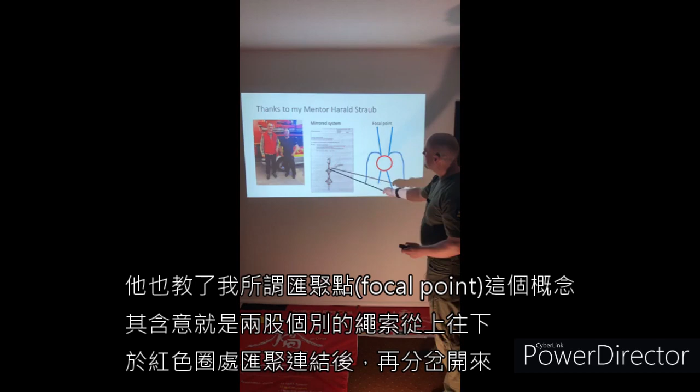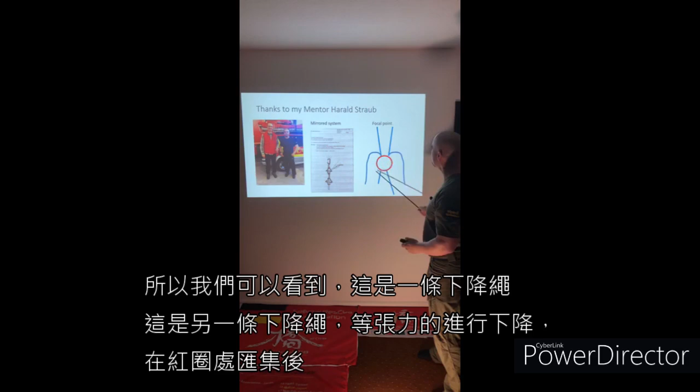And he taught me about a focal point. A focal point means that all the ropes from a lowering system come together at a focal point and are divided again. So this is one lowering rope, the second lowering rope. They are equally loaded. They come together at a focal point and share the load again, maybe to a casualty and to a rescuer. And I added bypasses to get a little bit more redundancy in the system.

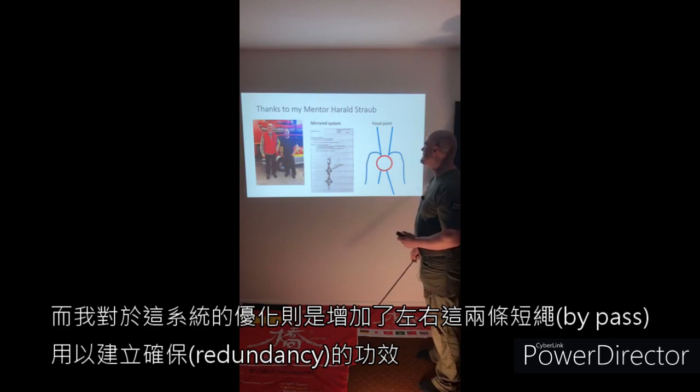So that you can imagine that better, I made this drawing for you. Both ropes come together at a rigging plate, the forces are divided again, and we have these bypasses. He taught me as well that a master's aim is to build compact systems, because if you have that, it's way less exhausting to get a stretcher over an edge without an artificial high directional. So if you want to train in a robust manner, you should search for compact systems.

On my approach to the system, I read many books, and one of those books is High Angle Rescue Techniques by Tom Vines and Steve Hudson. In that book, I found this drawing of the interlocking long-tail bowline as a focal point. I really liked this idea because it brings both ropes together and shares the force again.

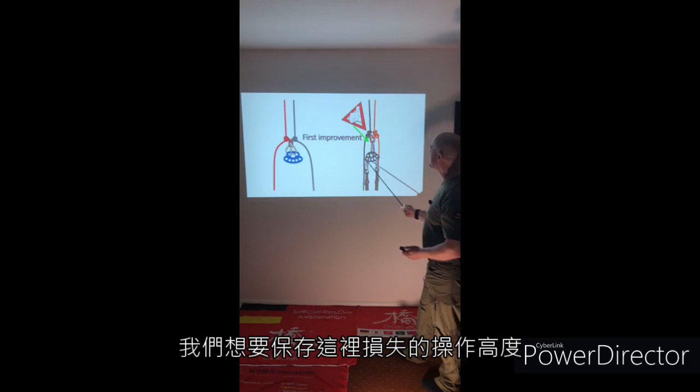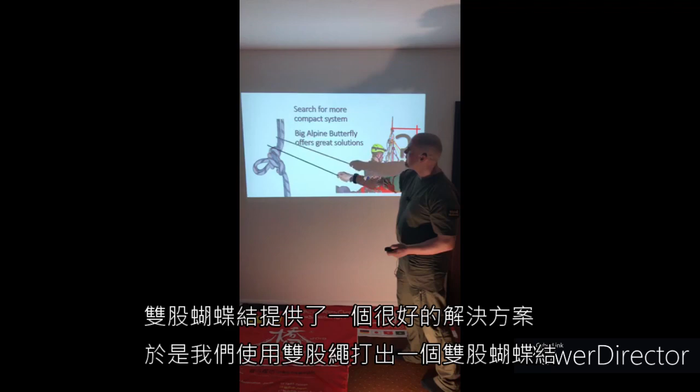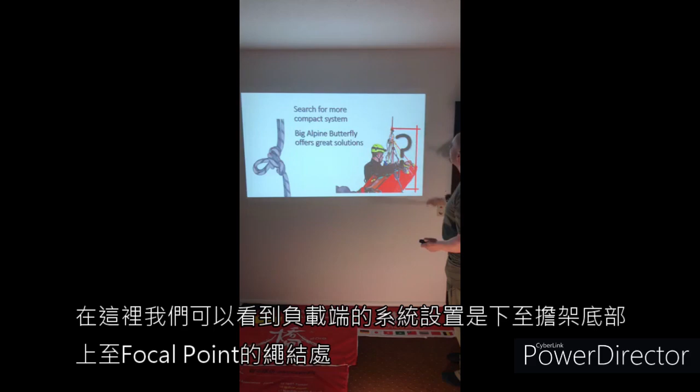And the big Alpine Butterfly offers a great solution for us. So we just take two ropes and make the butterfly knot with two ropes, so we're getting the big Alpine Butterfly. And here you see the system headspace is from the floor of the stretcher to the upper side of a knot. And the question is, how long is that?

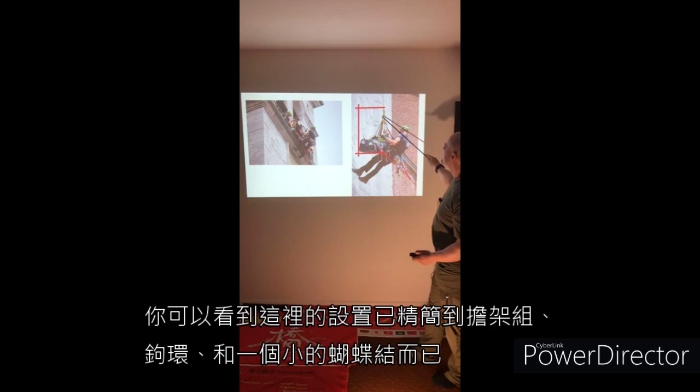I like flexible connections to the casualty because if you get lowered, you can adjust yourself and you can adjust the length. It's way easier to communicate with your lowering team. And especially if you have suicidal persons, you can lower suicidal persons below your feet, so they can't reach you, because they are in big stress and you don't know how they react. So I like to lower suicidal persons below my feet.

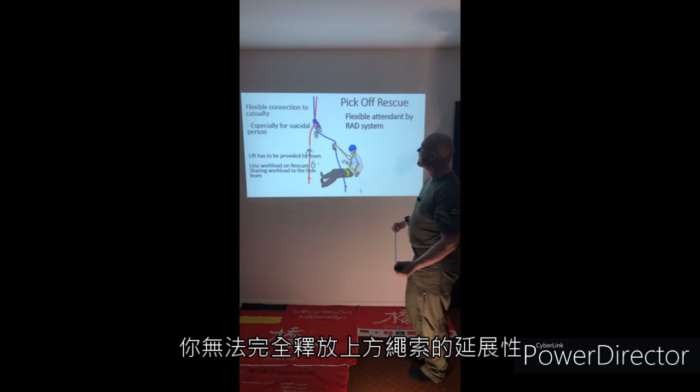I made a pick-off rescue on a wind turbine when 70 meters of rope were above us, and if you think you can make this with a short 4-to-1, I can tell you, you won't get out the stretch of the system. In that case, I just clip him. The rescuer has just the workload of clipping the rescue triangle and the redundancy, and the lift will be provided by the team. So we should have less workload on the rescuer. We should share the workload with the whole team.

From pick-off rescue to a stretcher rescue, we just have to change the grillon. We bring a stretcher in and take the grillon out. The biners from the big Alpine Butterfly to the stretcher are doubled and opposed, as they are highly exposed to edge and surface contact during edge transfer. So here on that point between our big Alpine Butterfly and the stretcher, we use 2 biners doubled and opposed.

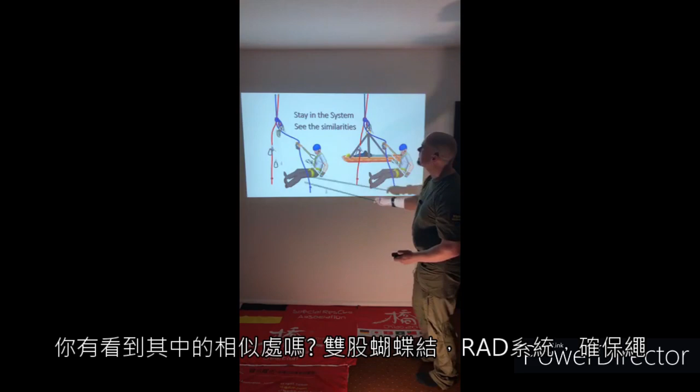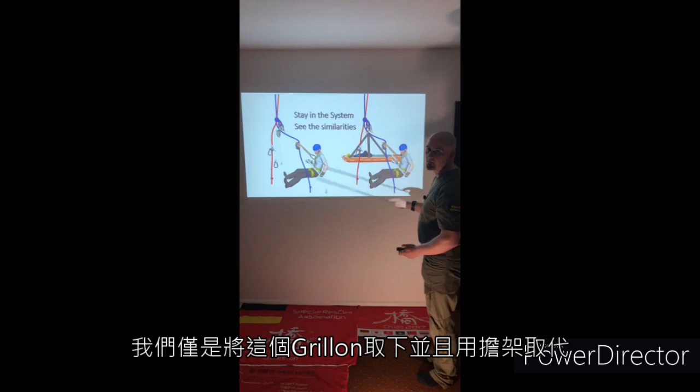So the big part stays in the system. Do you see the similarities? Big Alpine Butterfly, RAD system, backup, a short connection to casualty, and a bypass. And we just take this grillon out and take a stretcher in. So this is the way from pick-off rescue to stretcher rescue.

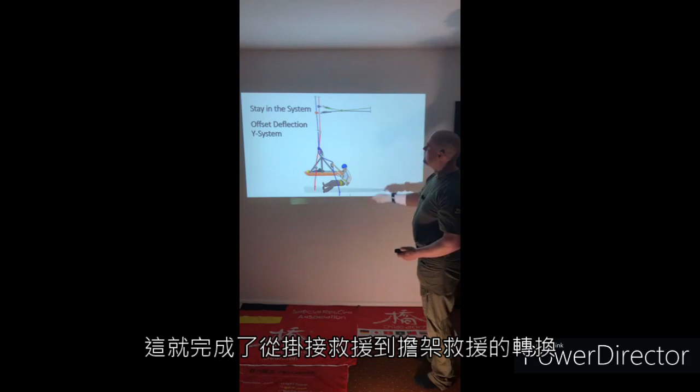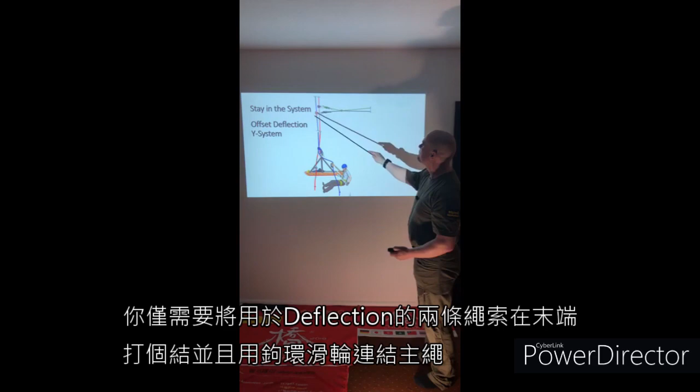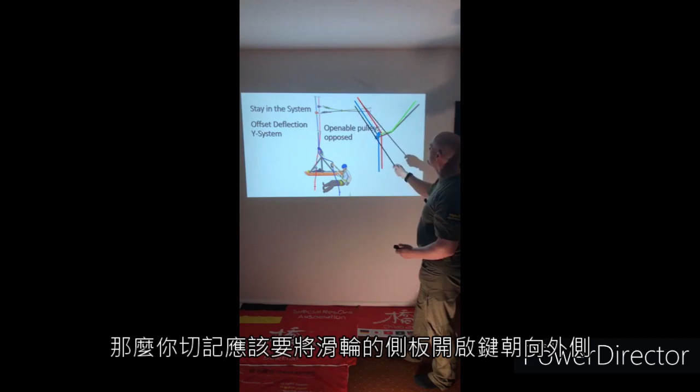Stay in the system. If we want to make offset deflection out of that, we just add 2 ropes, connect 2 ropes together and place pulleys here. Here I think there's an important part. If you have openable pulleys, they should be placed opposed, and the opening edge should be oriented every time outside. We call this a little bit more Y system because it's like a Y.

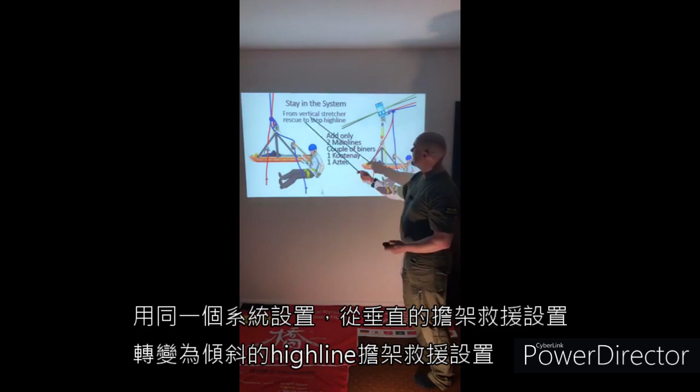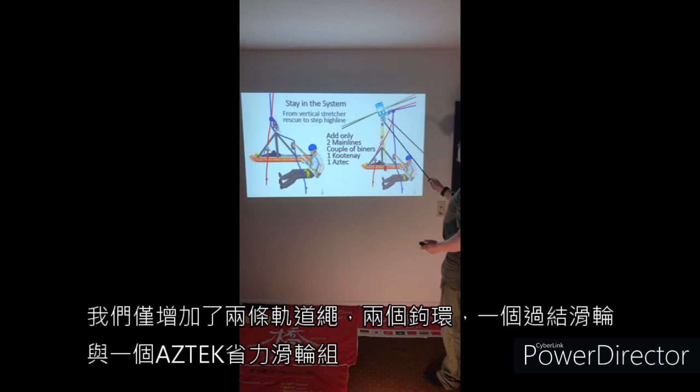Stay in the system. From vertical stretcher rescue to steep highline, we add only to this system 2 main lines, a couple of biners, a Kootenay and an Aztec. It's just the point between here and the stretcher which changes from the vertical stretcher rescue.

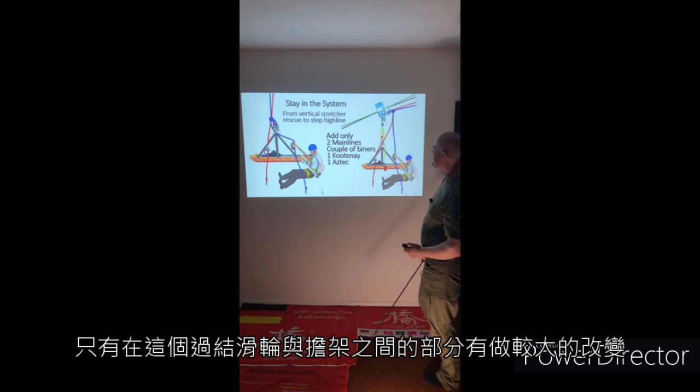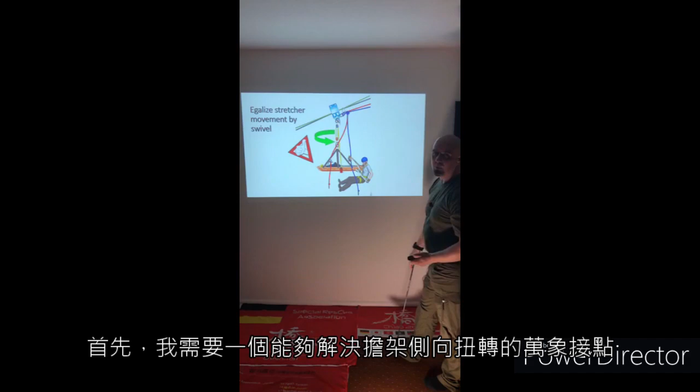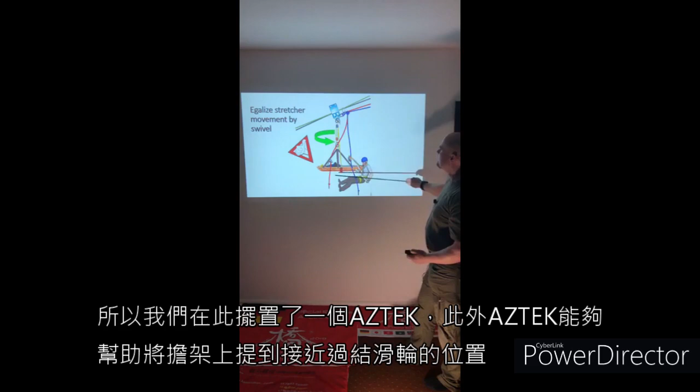I want to give you some insights in our steep highline rescue. At first, I need a part to equalize stretcher movement with a swivel. So we place the Aztec here. With that Aztec we can lift the stretcher into the system, and the Aztec has two swivels, so we equalize all movements of rotating the stretcher.

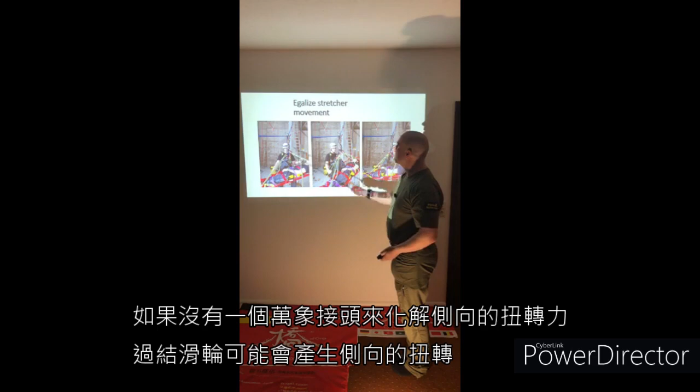You can see it in these pictures, and when I observe trainings or something like that, I see it often that stretchers are turning or be pushed by a rescuer in a bad position, and if we have no part which equalizes the movement, we turn our pulley sideways and the side plates of the pulley will meet the rope.

The side plates can get grinded by rope movement up to a sharp edge, and I think there's a possibility if a sharp edge gets grinded by ropes inside here, that these sharp edges can cut the rope. So if we have the Aztec here, we have two swivels, and you can turn around your stretcher and no movement will go up to your pulleys.

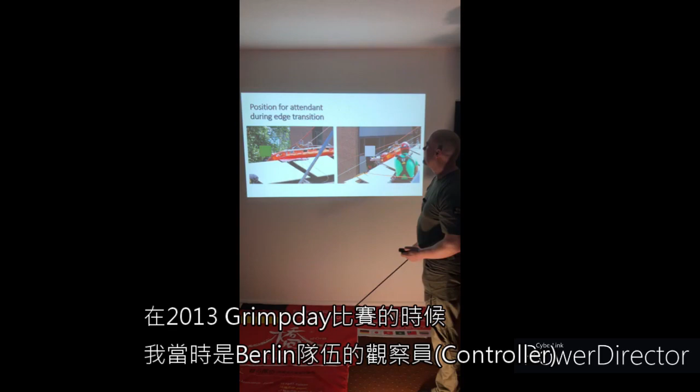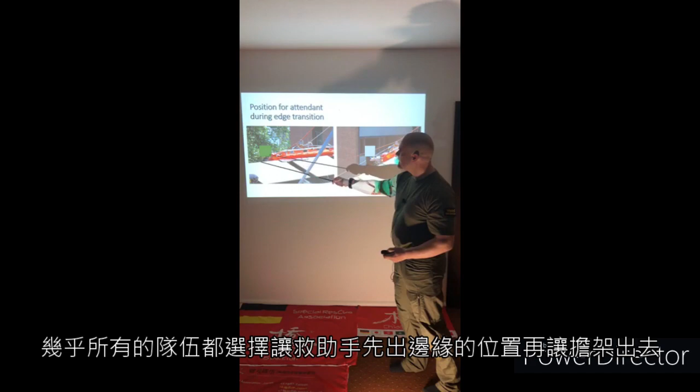Position for attendant during edge transition. Back in the days, 2013 at GRIMP Day, when I had been controller for the Berlin team, I could see about 12 teams in a scenario going with a stretcher over an edge into a steep highline. And about half of the teams put their rescuer first and the stretcher did follow.

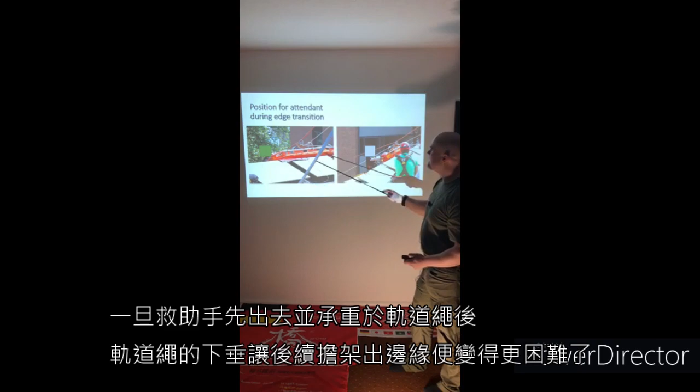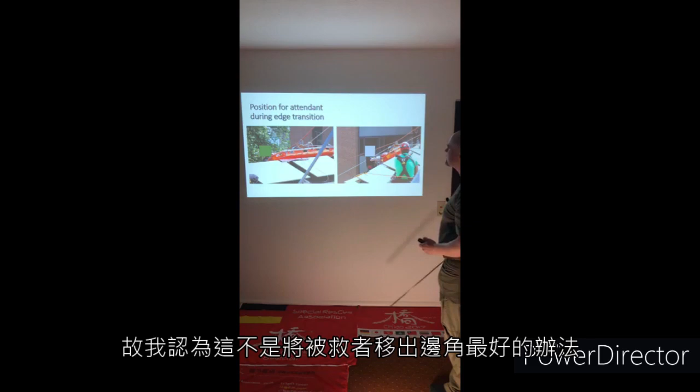The problem was when they did put the rescuer first, they got the first sag on the rope on the main lines, and then they couldn't go with a stretcher over the edge. So I think this is not the best way to go with a casualty over the edge. The other half of the teams put the stretcher first and the attendant follows, and it was completely different. So I think this is high evidence for a conclusion: stretcher first, attendant follows.

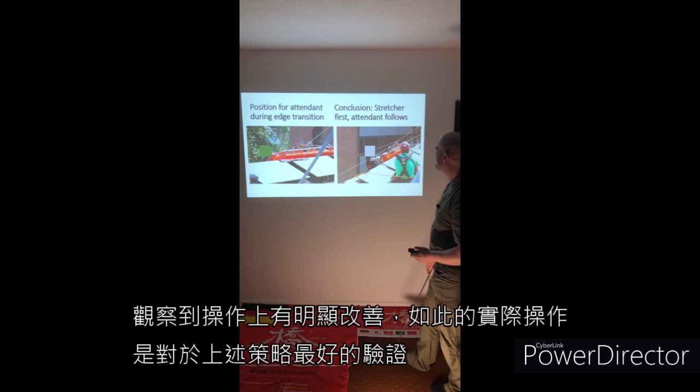We see it here again. We have not so much space here, but the stretcher is in the system. It was easy to get it out here, and the attendant climbs to the system as well.

Another big part is that the lowering lines must be parallel to the main lines, especially over the edge. So these high directionals should be very close to the directions of the main lines. If we don't do that, if we bring our lowering lines directly from this side, we pull with a big vector the main lines to the edge, and it's harder to get into the system with a stretcher.

Why do we use a Kootenay? We recognized that the Kootenay offers the ability to ride over twisted ropes. On these competitions, we were forced to big distances. So if you have to build a steep highline with 80-meter distance, it's not that easy like in your training center, because managing ropes so they are not twisted over 80 meters is not that easy, and we wasted a lot of time for that.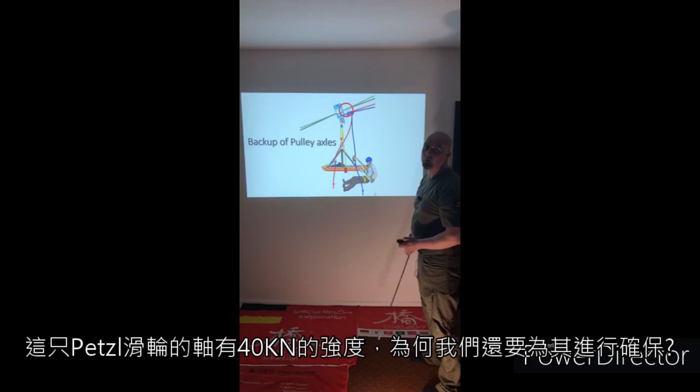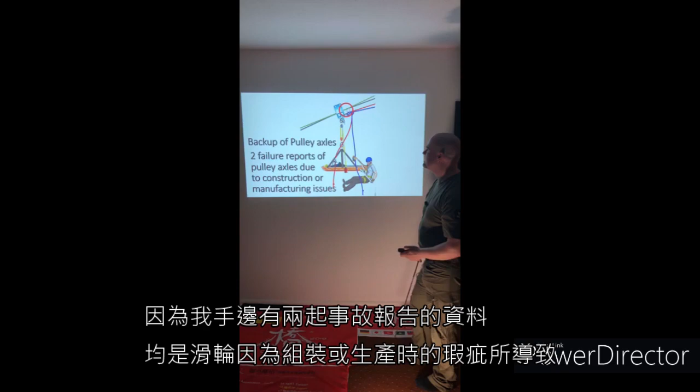Another big thing is that we back up every pulley axle, also the pulley axles if they are 40 kilonewton axles. Why do we do that? Because I have 2 failure reports available where pulley axles failed due to construction or manufacturing issues. So in my risk assessment, I think it can happen and I have to take care about that.

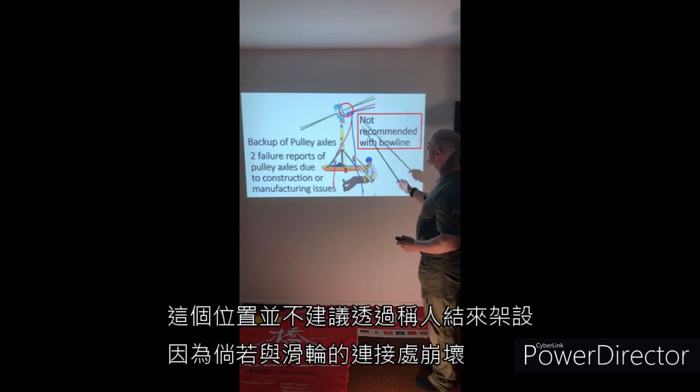This position is not recommended with a bowline, because if this one will fail, then we will have a bigger ring load on a bowline, and as stated in the books, I don't like that.

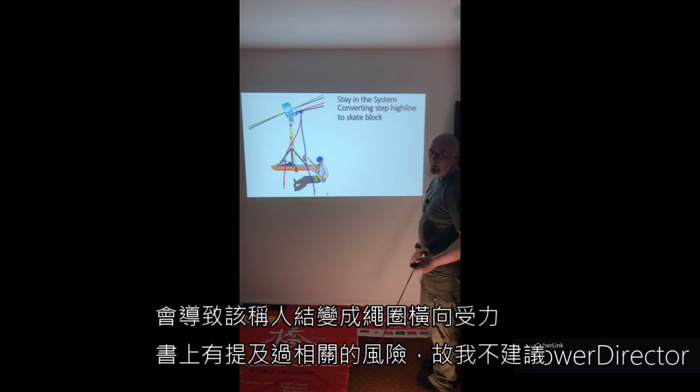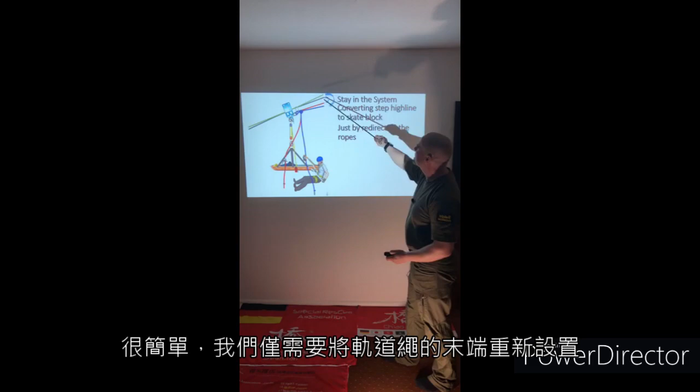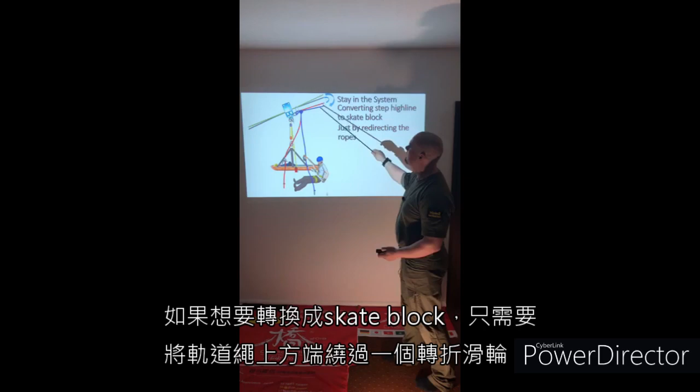Again, stay in the system. Converting steep highline to a skate block. It's easy with that system. We just redirect the rope, and for our steep highline it was shown with 4 ropes, and if we want to convert it to a skate block, we just take this rope and redirect it high above our exit, and we are getting a skate block system.

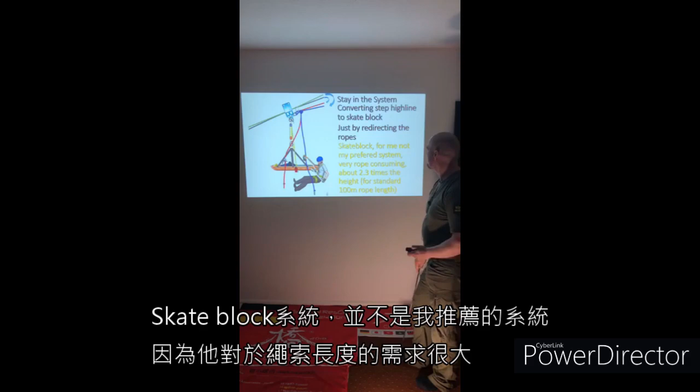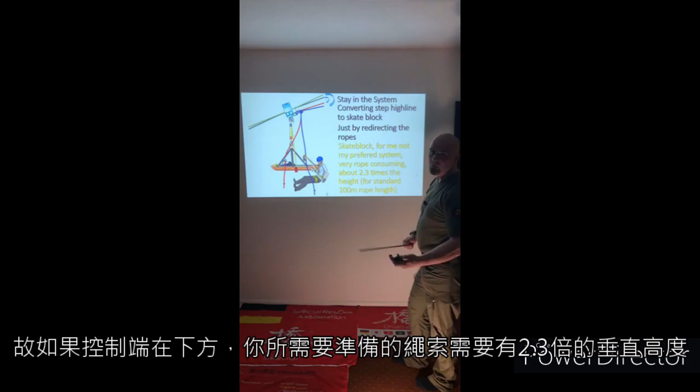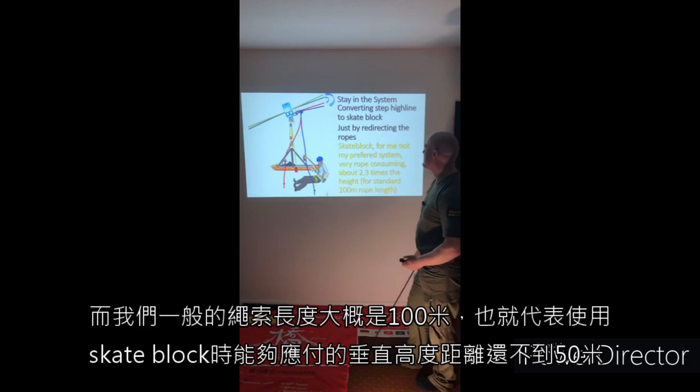A skate block system is not my preferred system because it's very rope consuming. The rope you have to use is about 2.3 times the height if you control it from downstairs. And our normal rope length is about 100 meters. So we don't even have 50 meters operational height with a skate block, so this doesn't make a lot of sense for me, but it's easy and we stay in the system.

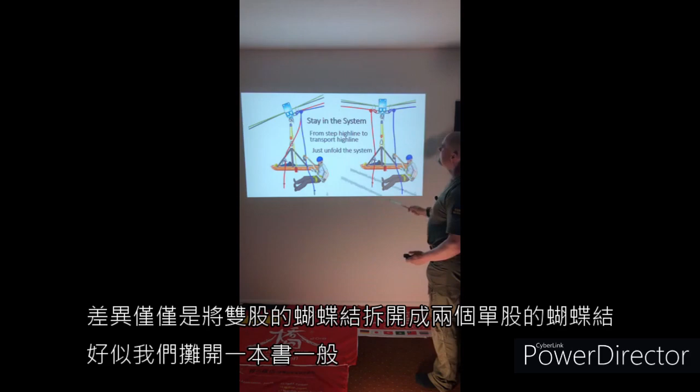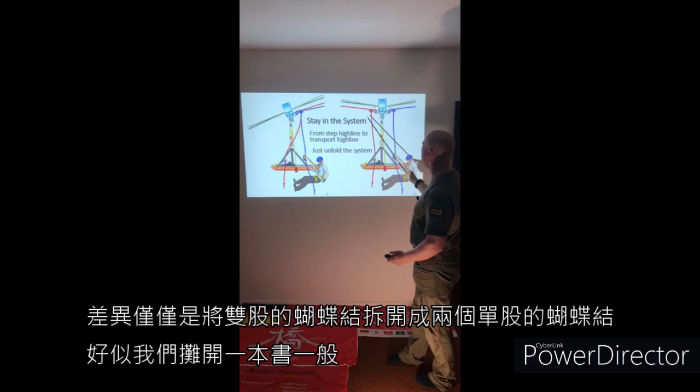Stay in the system from steep highline to transport highline. So we have a steep highline and bring it to transport highline. So we just unfold the system. We're going back from the big alpine butterfly to 2 single alpine butterflies. We just open the book, we just unfold the system.

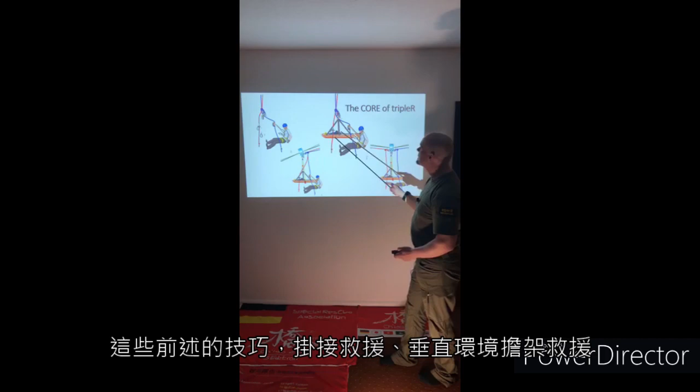So these techniques, from pick-off rescue to vertical stretcher rescue to steep highline to transport highline, this is the core of the TripleR system. Let's talk about advanced techniques. An advanced technique is like the mirrored English reeve. This was our standard since 2014, but it's going to be replaced.

The big advantage is that the attendant has hands-free. During every move, he doesn't have to place a backup, he doesn't have to operate anything, and it's easy to move sideways because the rope is resting on the reeve. But this system is gear consuming and has difficult rope handling during installation, even for a well-trained team.

So on competition day, I think with my team, we had been very fast on that, but we had to bring 5 ropes over the gorge. The French teams are way faster with their system because they have only to bring 3 ropes over the gorge. So bringing 5 ropes over the gorge, well managed, is really hard.

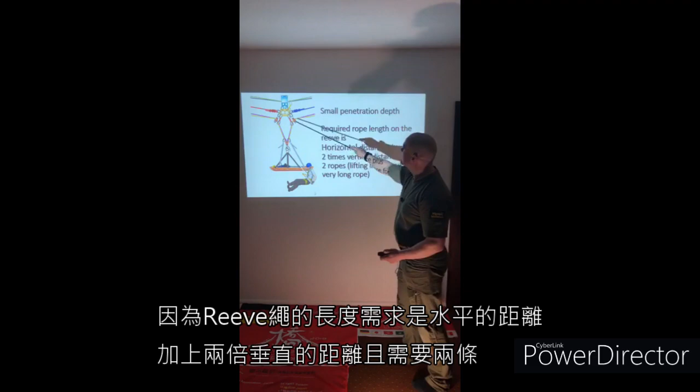Some insights in that system. The system offers just a small penetration depth because the required rope length on the reeve is the horizontal distance plus 2 times the vertical distance. So with 100-meter ropes you don't have a big distance to cover. So normally you need very long ropes for highlines.

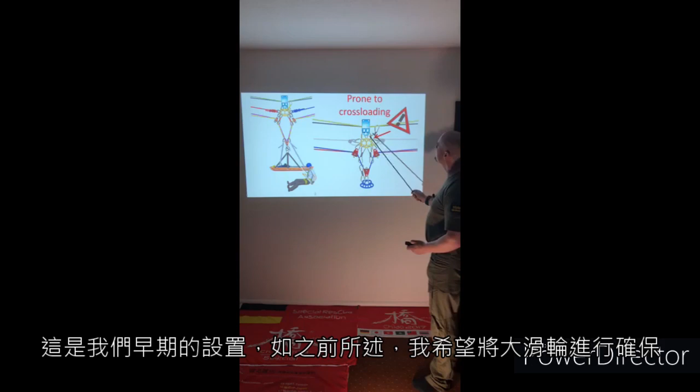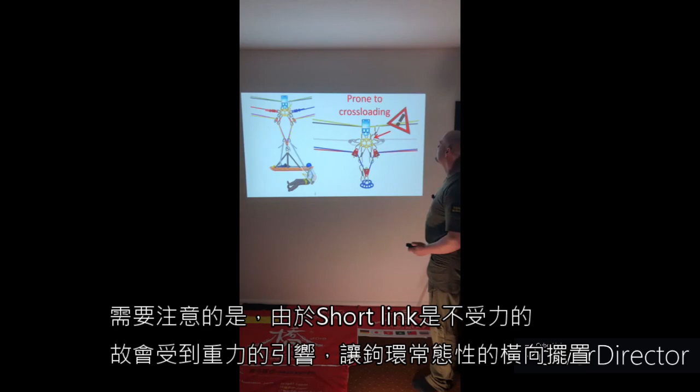This is our earlier setup. Again, we wanted to back up the axis of the Kootenay, and we were using an express sling, a short sling, but this carabiner here is gravity oriented, and gravity put it cross-loaded in the hole every time. So this was not so fine, and our solution was that we attach an open ring with one of those short slings permanently to our rigging plate and just put a carabiner over there, and so we have redundancy without any shock load.

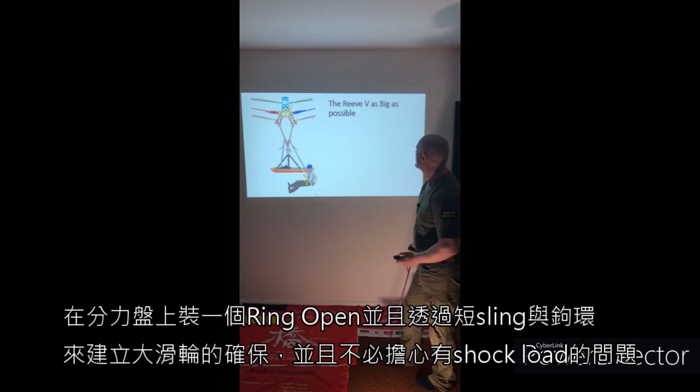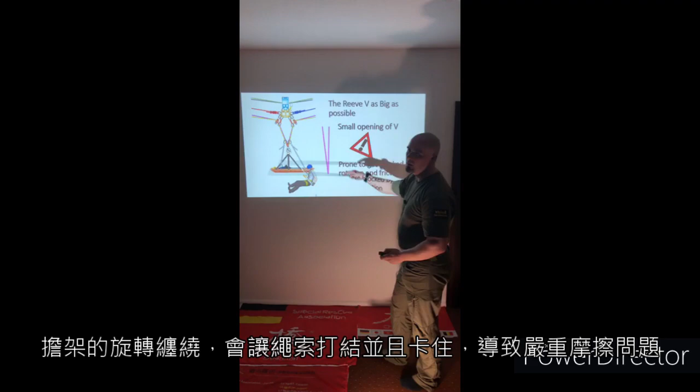The reeve V, it's like a V shape, should be as big as possible. If you just have a small opening of the V, it's prone to get blocked by rotation and friction. So if you go down, the rope's own twist makes the stretcher spin, and you will get blocked by the rotation and the friction of the twisted ropes. We had it in a 25-meter canyon, and we needed a lot of force to get them back out.

This is also a dichotomy between the real world and training center heights. If you do that just at your 12-meter training center height, you don't even recognize this problem. But if you go out, or in a competition they force you to do this at 25 meters, it's completely different. So the reeve V as big as possible.

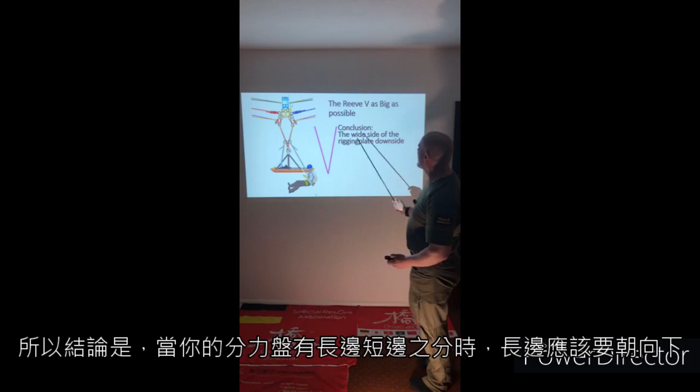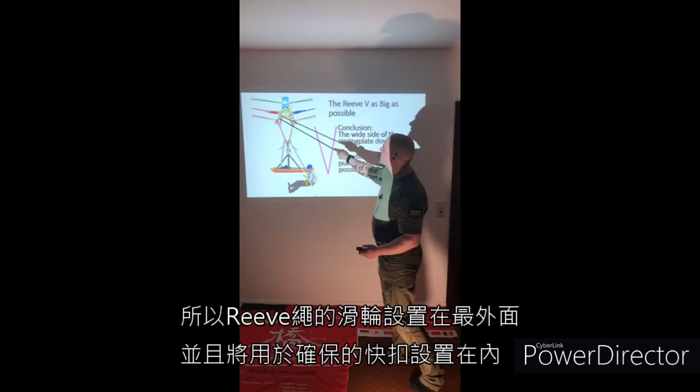The conclusion for us was the wide side of the rigging plate should be oriented downward, and the reeve pulleys placed as far apart as possible. So the reeve pulleys go into the outside holes, and the short slings for redundancy go to the inside, because on the inside they are well oriented by gravity. If you take these pulleys one hole more to the inside and this redundancy outside, they are prone to cross-loading, and you make your V steeper, so that's not fine. So for me this is a part of clean rigging.

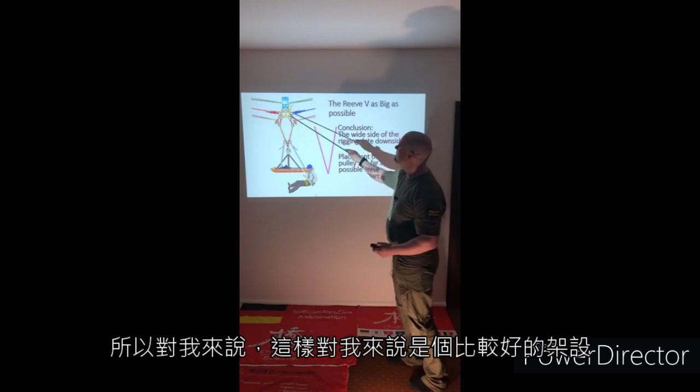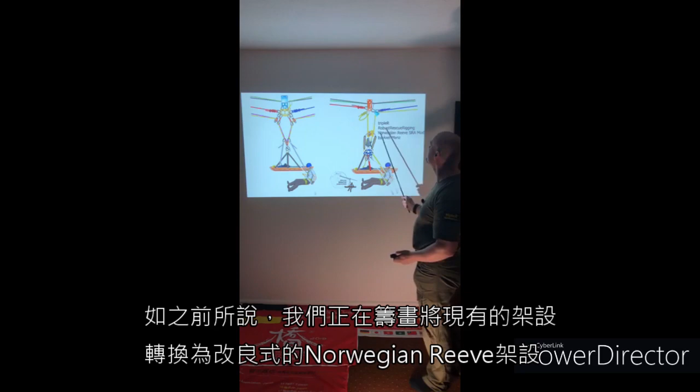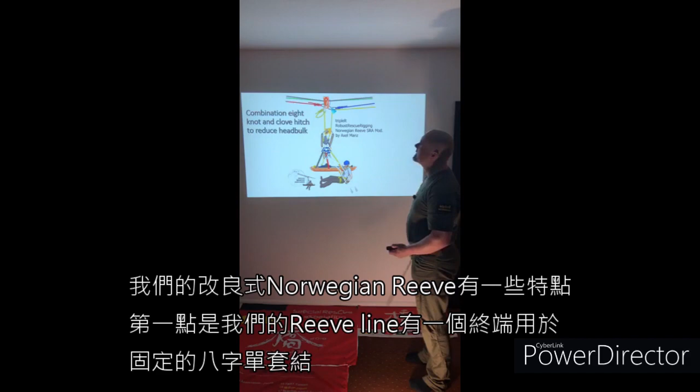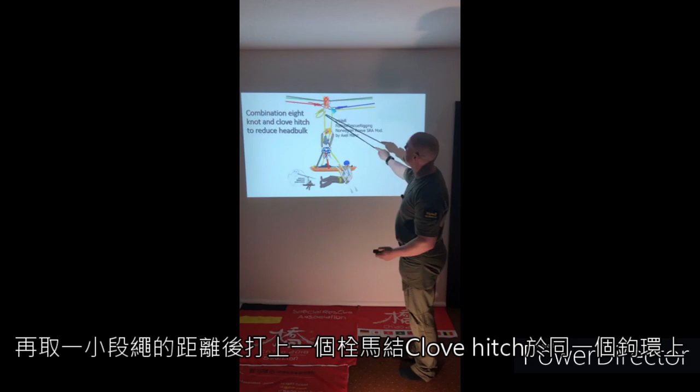As I said, we are going to switch this system to a modified Norwegian reeve. We have some specialties on this Norwegian reeve. The first part is we always have secured 8 knots in our ropes. But if we just clip an 8 knot onto that system, we lose a lot of head space. The system height just gets bigger. So normally we just clip the spinner to the pulley, clip in the loop of the 8 knot and place a clove hitch behind. So we can go up with the system directly to the rope from the clove hitch.

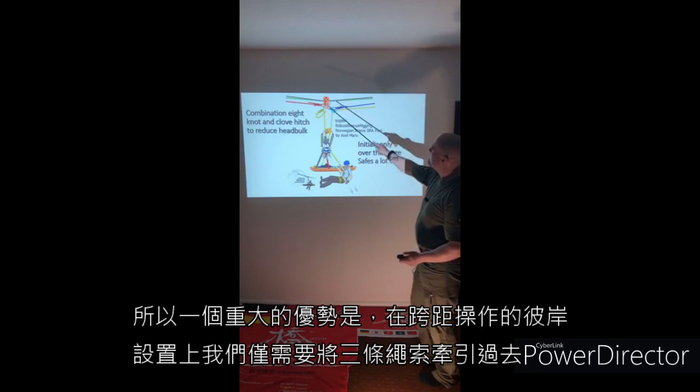A big part is to the far side. We just have to bring 3 ropes over the gorge. And why we modify this? Because with a clutch, if we want to go sideways, if we lower this rope and pull tension on that, the load just rests on the clutch.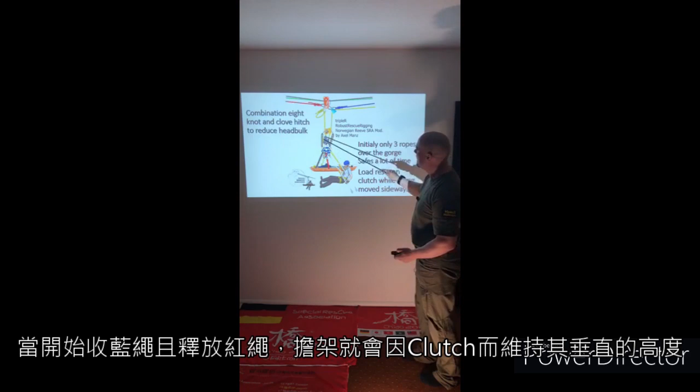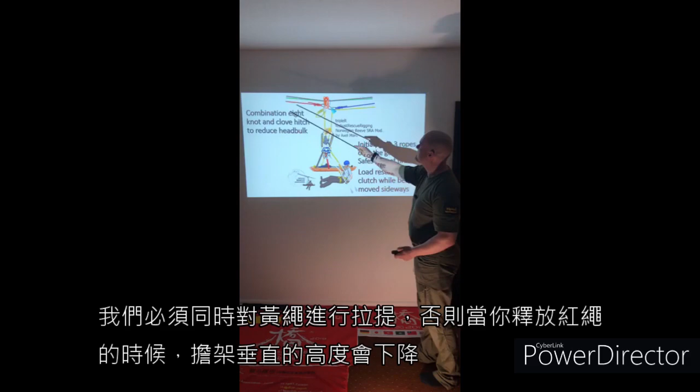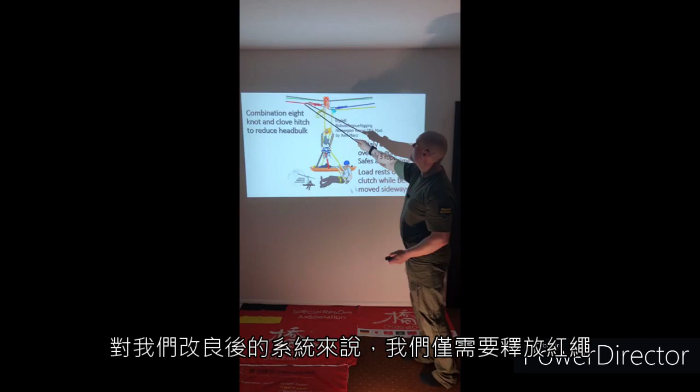If we have a traditional Norwegian reeve and we want to go sideways, we also have to lift the load again, because if we lower that side, the load will go down and we have to apply big forces here. So with our system, we just have to lower that side, pull this with a 3-to-1 and take in slack here, because the load rests on the clutch while being moved sideways.

Actually, we only recommend this with a CMC clutch. We were working on this system for several years and did test it with other descenders, with traditional style descenders, and I can tell you we cracked 2 traditional style descenders. So actually I can only recommend it with a CMC clutch.

We place here redundancy as well, so if something will happen here, the system gets caught as well. Again, we place this with open rings because we want to avoid cross-loading on this part.

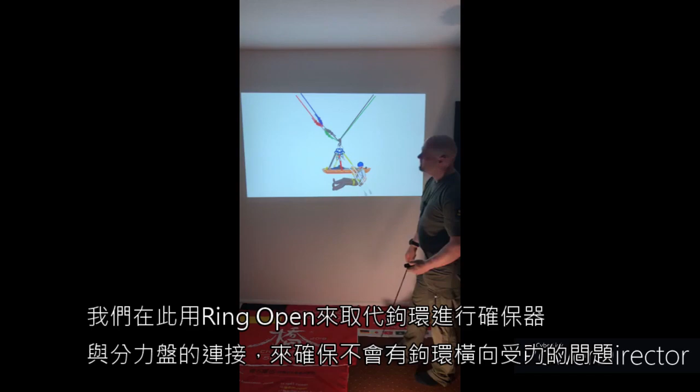A little bit a special part is cross-hauling, and we wanted to make a cross-haul setup where these biners are less prone to cross-loading. So we just take again our big alpine butterfly, placing them with 2 biners doubled and opposed to our focal point, and using the tails, and the tails will be clipped into our ropes from the other side for cross-hauling.

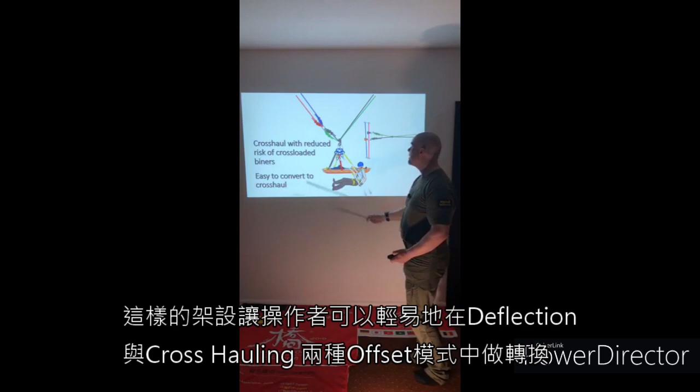This system is easy to convert to cross-haul because we just have to unclip these 2 biners and place 2 pulleys on that and bring the pulleys on this part. So I think you might see the similarities again and again.